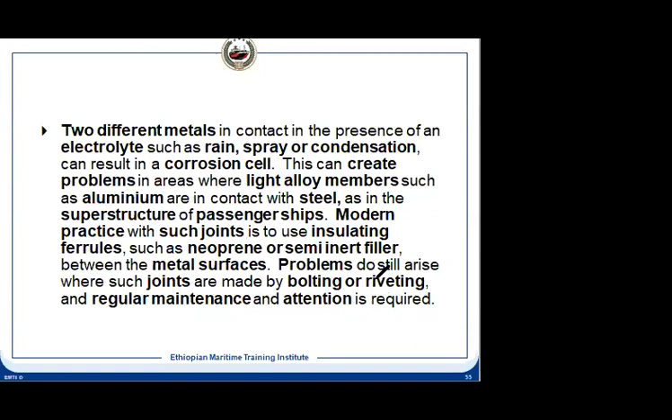The last slide in this chapter is that stainless steel is used in passive mode. Passive mode means the reduction potential is high and it is less active, so that it is immune to electrochemical corrosion.

And sacrificial anode security has to be checked. What is security? We have seen the sacrificial anode welded on the surface of the hull. So suppose, for an example, this is the anode, and this side is uprooted - it was welded here, but now this side is welded and this side is not welded. Then what will happen? We have calculated how much current, how many electrons, will flow through this. Now less electron will flow because this is uprooted from the hull, so protection will reduce. That is the reason this security should be checked, that it is welded, so that electrically it is connected. This can happen in the tanks also.

Now tell me, for the hull we have seen it is attached to the hull. In the tank, where is it attached to? Where do you think it should be attached to in the tank? So you have a tank, for an example, this is the tank, and we have a DB tank or the side tanks, and then we have the internals, for example these are the longitudinals. So where do you think it should be fitted?

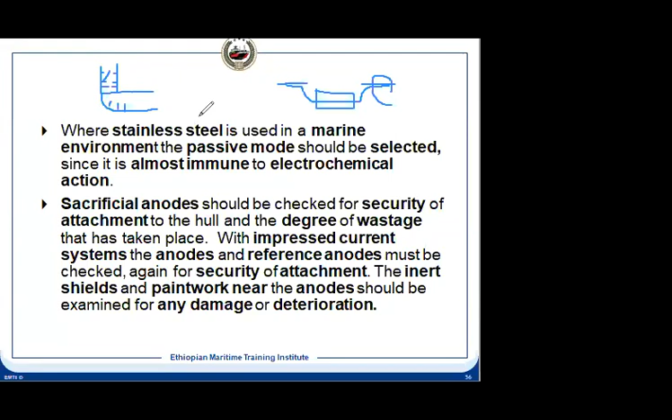And paint work has to be like an inert shield. Also for ICCP, we need to check if there is any blister. This used to happen when ICCP was new to our industry - at that time they did not realize this could happen. What we have seen is that hydroxyl and alkaline areas can get blisters, and the paint can get damaged, and that area can get corrosion. After that, they came up with special paint requirements. So that painted area has to be checked for any damage or deterioration, because otherwise corrosion will start in that area.

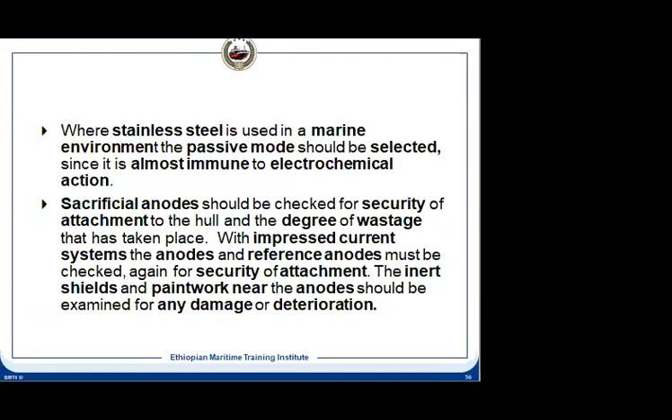Now there are questions on certain things. Like one question you had was about brazing in the last chapter, and brazing and soldering.

Now another thing - this is ICCP. Last class you asked me about ICCP in more detail. But was it covered in this chapter? I mean function 2, that is the electrical - it is part of it actually, but it's irrespective of that. Let me explain to you. So here we have the reference anode electrode, and this is the anode.

Now this is the control system. This reference electrode is measuring the potential of the hull, and this is connected to here, and then this is connected to here. Now this should be insulated, meaning it should not be connected to the hull here. So there will be an insulation barrier between the sensor and this, so that the hull potential can be checked.

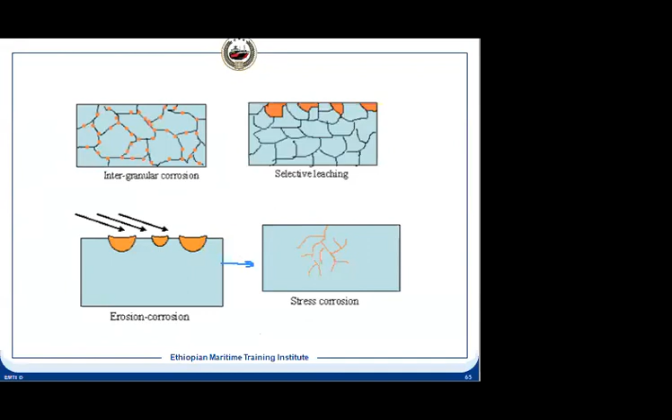So in this case, what will happen? This is the hull we want to protect. So the direction of the current should be from the anode to the cathode. That's why this arrow we've seen - the current is flowing from the anode, which is our ICCP anode, and giving the current in the direction from anode to the hull, so the hull will be protected.

And through this current is flowing through the electrolyte - this is the electrolyte, because this is submerged in our seawater. So the current flow direction should be like this. And why do you need insulation here?

There should not be any electrical connection between this anode to the hull, or reference anode to the hull. Otherwise, what will happen? It will short circuit. The current will not flow through the electrolyte. So that's why this has to be insulated always.

And the current direction is this. And if you see, this area has to have that special paint from here to here. The area will depend on your maker - they will tell how much area should have the epoxy paint, so that there is no alkaline damage to your paint. If paint is damaged, your hull corrosion will start.

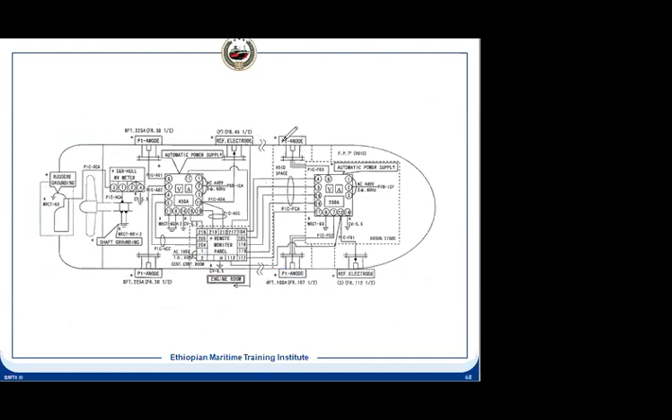Now certain things - how this area's construction, arrangement, you need to know, and how many you can have here in this diagram, but it can vary from ship to ship. In this diagram, if you see, this is an anode, this is anode, this is the reference cell, and we can put another reference cell here. There is a cofferdam here - so inside that you have the anode reference, and on the aft side you have this.

We have this anode, another anode, and the reference cell here, covering the complete ship. Through the anode, the current will flow outward to the hull, so the hull is protected. This is the sensor, a simple control system. There is a sensor sensing the potential, which is compared and given to the controller. The controller compares it with the set value, and according to that, the impressed current through the anode goes to the hull. So the forward part is through this, and through this. This reference anode measures the forward part, and this measures the aft part. This is the way it is done.

This anode also has a capacity. If you see here, it is written 225 amps, meaning that is the capacity. It has been calculated how much will be the maximum amps to be applied. It is kept higher than that so the anode should not get damaged, because it is impressed current supply, external current from the ship that we are applying. So the anode life should be longer, that's why a noble material is used for the anode. This is the basic arrangement and the principle.

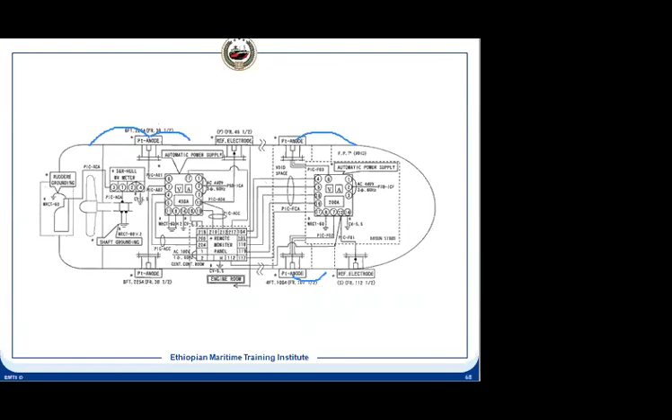It's all ICCP, same principle it maintains, because this concept has come from the corrosion cell I had shown you. And then this is the arrangement for the anode.

This is the anode, this is the sealed compartment, and then this is the hull. There is a neoprene material, which is the insulating material, and then it is blocked here. Inside, if you see, this is the Teflon packing you have. And after that, you have the nut, so you can tighten this nut, and this is like a gland. And this is an insulating barrier.

After that, you have the gland, this is the gland, and this is SEMKit. This is the filling, the service engineer fills it here, and then the electrical connection from here - suppose this is the anode, then the current will come through this, and it will give the current in the outward direction to the hull. So this is the arrangement of your ICCP anode.

And it should be in a cofferdam. And another thing is there, which is not in the syllabus, but is also important to you.

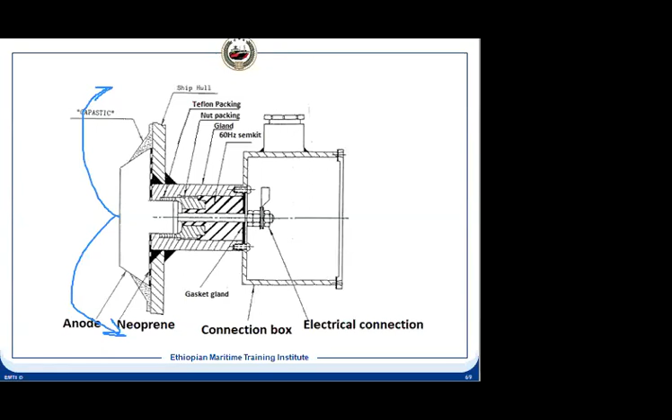I'll actually incorporate it once I review and we print it. The MGPS - MGPS also you need to know. So what is the MGPS? MGPS is Marine Growth Prevention System.

This is used for the seawater piping system. Why do we use it? So that when we are taking seawater from the sea, there can be marine growth which can enter, and then multiply.

Yeah, Melissa, tell me. Melissa.

Yes, Chief. I have one question on this ICCP before you go to this marine growth topic. On this ICCP system, when we go to the freshwater area, we switch off the system - that means the electrolyte is weak. So what will happen if we leave it like this? Is there any damage to the system, or what will be the consequence?

Thank you. So sometimes we switch it off because of the electrolyte. Actually, this design is made depending on the electrolyte. As I told you, this electrolyte changes - it is one of the factors for how much corrosion there will be, the rate of corrosion, and all the calculations will change. What we do, since seawater is more corrosive, we design as per the seawater. Once we design as per seawater, we run it in seawater. If we want to run it in freshwater, then the design criteria will change. It means in that case, what will happen?

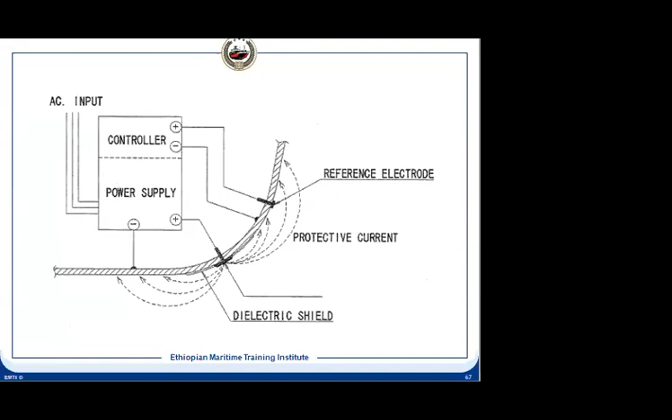Yes. Let us see the differences. Here, I had shown you this diagram from where we took the concept of ICCP. Current is flowing through the electrolyte in this direction, anode to cathode. What we have done is applied a current in the opposite, reverse direction towards the anode, and the anode will become the cathode and it will be protected.

Now, this is not sacrificial anode. What is the concept of sacrificial anode? In sacrificial anode, the concept is like this: this is the anode which is giving—zinc ion is coming out and leaving the electron behind in the metal, and that electron is flowing to the cathode.

That's why if you see the sacrificial anode, it is welded here, electrically connected here—that is not through the electrolyte. This is our hull, connected, welded here and here. What is happening? Zn++ is coming out, and because of that, 2 electrons are leaving in this metal. That goes in this direction to the metal we want to protect. So this is 2 electrons—from here, because it has to neutralize, it goes to the hull, and that gives you a cathodic reaction.

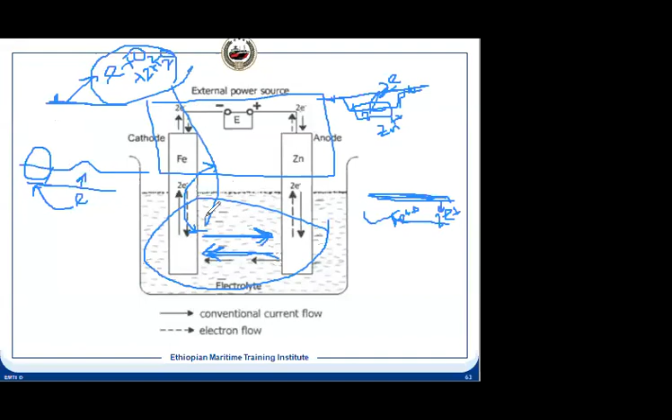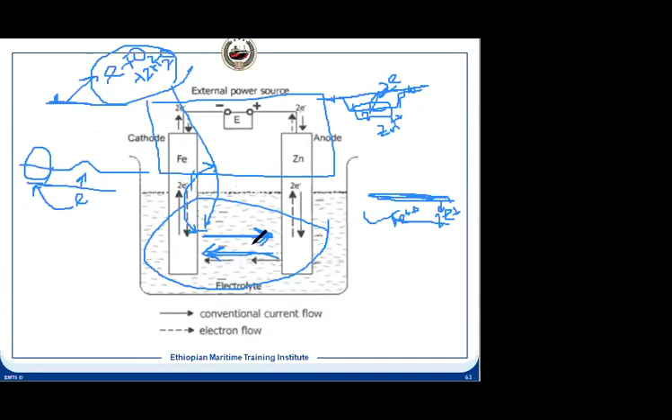So there will be some place where the cathodic reaction will take place, and it will get corroded. It can be uniform also. In that case, at all places electron will come out and metal also will come out, and the electron will react with water and become hydroxyl, and finally it will become ferrous oxide. That is the rust.

Is it clear, Sophonis? Yes, thank you. So I think Ateika wanted to say something. Yes, sir. Can you hear me, sir?

Tell me. So sir, when we are injecting current to the hull, what are we really doing? I mean, are we covering the hull metal from the seawater by electric field, or are we making the steel, the metal, non-reactive?

No. In the underwater portion, we have an anode, we have a cathode. In this case, this is the cathode, and this is the anode. And we have the electrolyte. Underwater portion, we have the steel hull. We have the electrolyte, the seawater, and we have one anode, the impressed ICCP anode.

Now what happens in the electrolyte if you have two metals, one cathode, one anode? This electric current is flowing in a particular direction in the electrolyte, from the anode to the cathode. It means the cathode is protected, we know. Current is flowing from anode to cathode.

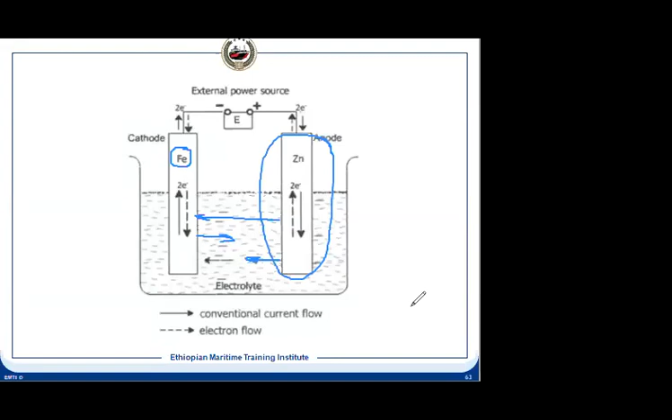That's what we are doing in ICCP. In ICCP we have an anode, the hull is Fe. Now, if you see what is the material for the ICCP anode, if you check the electrochemical series or galvanic series, that has actually more reduction potential than iron. So iron should get corroded.

But what we are doing is considering the direction of flow of current. Though it is platinum, we have applied impressed current which will come out from the platinum and then go to the iron, through the electrolyte.

So the direction of current we have changed. Though this is not zinc, we are using platinum, or some other also we use, but platinum, modern vessel, we use platinum. So actually in this condition, if you don't do impressed current, if you don't apply, what will happen? Current will flow in this direction and Fe will get corroded.

What we have done, we have applied the impressed current, and that current direction, we have changed it to this direction. So that the Fe, that is the hull, has become cathode. And this is the anode because the current direction is now from this to this. But if you don't use the impressed current, what will happen? Current will flow from here to here because the platinum is less active, a noble metal compared to the Fe.

So that's what we are doing. We are not making the steel or something, only the direction of current we are reversing. In normal condition, direction of current will be in this direction because this is more active than this. But what we have done, we have applied an impressed current. The direction of current we have made this way through the electrolyte. So what had happened? This has become anode, we call it auxiliary anode. And this is cathode, which is protected. Is it clear, Teka?

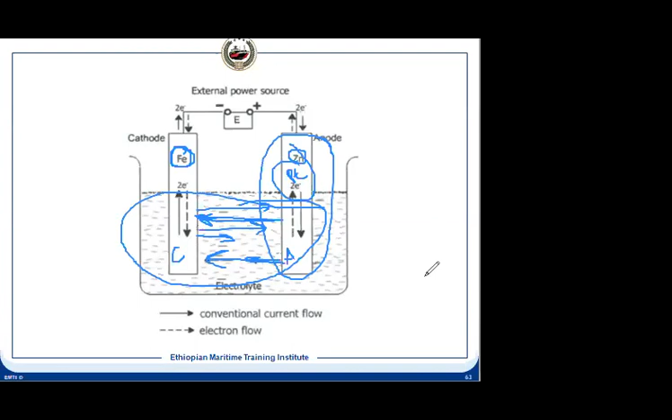So Teka, tell me, the rust or the corrosion means iron, in my understanding it's iron oxide. So from the iron, the electron flows to the water, so it will react with the oxygen. But if we can supply electron to the seawater, the electron will not take from the iron, but the electron will react with the oxygen. So the oxygen will not make reaction with the iron. But now in the previous diagram, as you show, the current is just flowing to the metal, to the hull again. So that's why, that's what makes me a little bit confused.

Let us see this again. This is zinc, okay? This is anode because it is more active. This is cathode. Electron flow and the current flow, let us check. This dotted line is the electron flow, and this line is the current flow. Zinc ion is coming out, electron is leaving in the metal, electron is moving this direction and coming to the cathode. Okay, but current will flow in opposite direction to the electron. Current is flowing this way. This is the external circuit.

And this current will come here and then it will move to this direction because the circuit has to be completed. This is the current flow, what I have just drawn. So what is the current flow in the electrolyte? From anode to cathode. What is the current flow in external circuit? From cathode to anode. What is the electron flow? Electron flow is opposite direction. So anode to cathode, we have seen the metal ion is coming out, electron is leaving, and it is coming here. And that electron is actually coming out here, which is making a cathodic reaction. And then this full reaction we have seen, that is the oxide is formed.

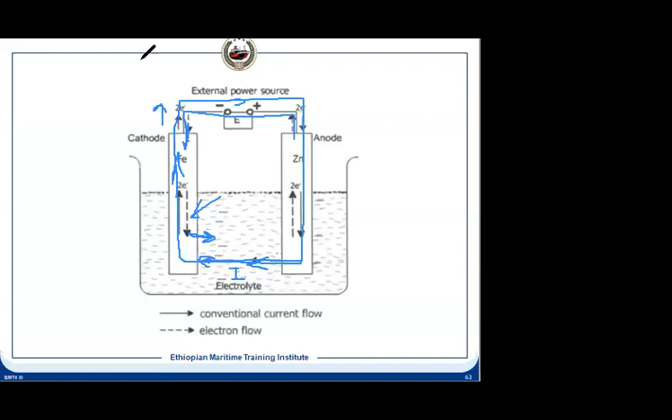Any other question? Otherwise, I think Sophonius raised hand. What was your question, Sophonius?

So when we use this platinum, nothing will happen to the platinum due to this current flow? Yes, that is the reason we use the noble metal. We don't want it to be worn out. It is a very noble metal we use. It has got a life, but it will be long life. That is the reason it is a very strong material we use, which is a noble metal. Otherwise, if you use a lower grade, it will get wasted because so high current is passing through that, and it will get wasted. You'll have to change it.

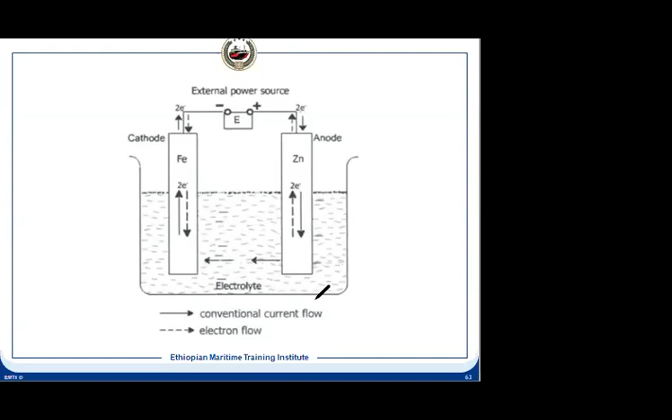Now the marine growth prevention system. So what is the marine growth prevention system? It protects our seawater piping system, and it protects our seawater pumps, any equipment with seawater flowing through it, that also is protected. What is marine growth? These are the aquatic life which enters with the seawater, and then it can multiply and stick onto the surface of the pipe. The heat exchanger filter can get choked because it will grow. Many of you might have seen the shell. Sometimes if your MGPS is not working properly, you will see that the filter is choked completely with the shell. So we don't want that. The primary purpose of it is to prevent the marine growth.

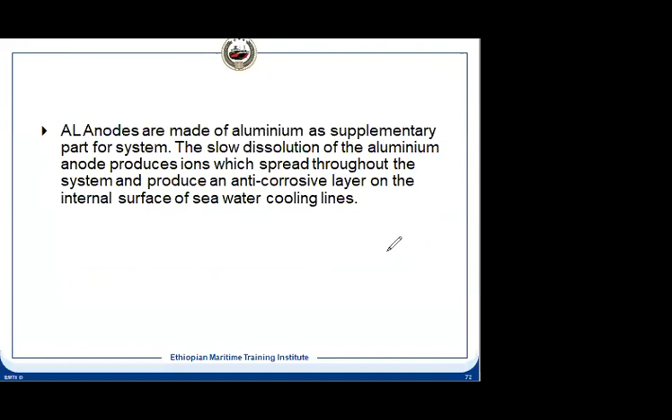Okay, so let's continue. This copper, we have seen what is the reaction, then aluminum, we have seen what is the reaction, and aluminum gives us a coating, an anti-corrosive layer on the surface of the seawater cooling system, including the pump surface also. Inner surface, it will protect you from corrosion.

So that is the MGPS system. And this MGPS, we apply IC, means the impressed current. Once we apply the impressed current, current is coming out from the anode. Once it is coming out from the anode, why we use the current, we can control how much ion will be coming out.

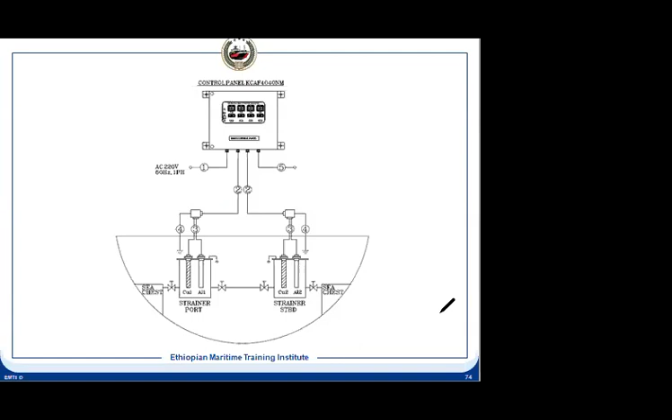Again, it is a problem. Hello, can you hear me now? Can you hear me? All of you having problem or some of you? Can you hear me now? Can you hear me? Hello? Is it clear now? Your sound is still broken. Is it clear or still have problem? No, Chief, your sound is broken. Okay, let me check. Chief, I can't.

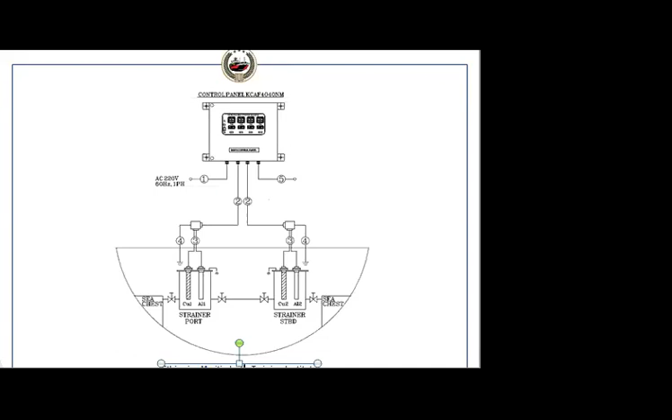So now tell me, is it clear? Is it clear now? Hello? Yeah, is it clear now? Yes, now it's clear, Chief. Now it's better, okay.

Let us restart. So this is the system we have. We use the impressed current here. For an example, this is the sea chest shown. You have the crossover, and then you have the anode on the port and starboard side, two anodes, aluminum and copper. And when you apply the current, what will happen?

How much current you apply will depend, because the anode is in the electrolyte, and the current is coming out from the anode. If more current is coming out, what does it mean? More metal is wasted, dissolved in the electrolyte. So we can control how much quantity of metal we want to dissolve in the seawater when it is flowing. So we know the capacity of our system, and accordingly it is made, meaning accordingly how much impressed current will be applied.

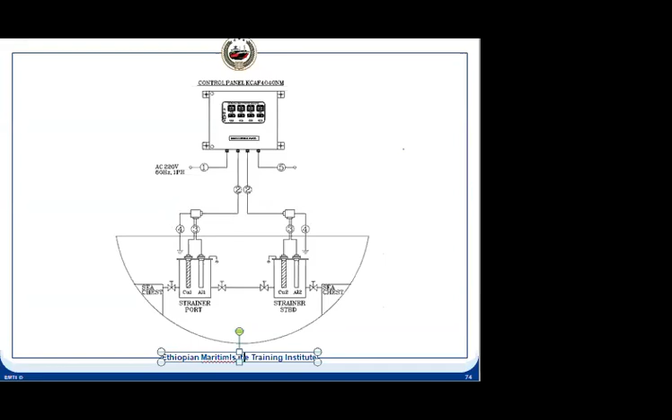The EOB asked one question, about the anti-fouling ion which is preventing marine growth. That copper ion which is coming out, that is preventing the marine growth. It means it does not allow marine growth. It will actually kill the marine growth, and also not allow it to stick on the surface. Whereas aluminum gives us anti-corrosion protection, a layer on the surface. So that copper ion is protecting from marine growth.

So if you see, this copper ion is carried, transported with the seawater, and that prevents marine growth. It means it does not allow marine growth, that aquatic life, to grow in the system. So they go out from the system and will not get accumulated in the system also because of this ion. Like for example, when you see freshwater treatment has already been done, we have the Ag ion which actually kills bacteria, the marine life.

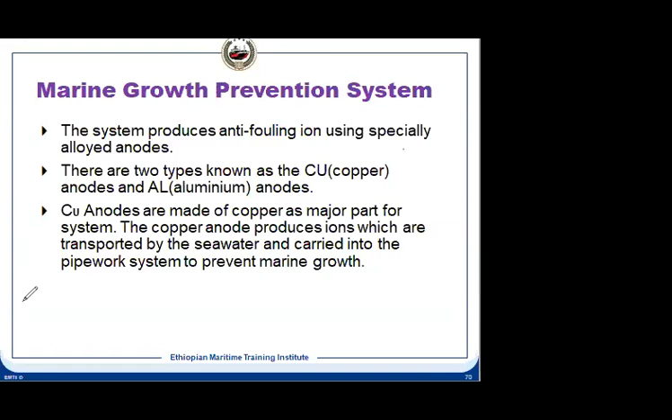So here also, the copper ion and silver ion both do the same thing, but silver is better than copper. Here we use copper because it is only for seawater. So this ion, what is it doing? It is killing the aquatic life, the marine life. Those can grow and damage our system, it can get choked.

So with this impressed current, we can adjust how much ion we want to dissolve. Accordingly, the impressed current is adjusted. It will vary from system to system. On your ships, you must see the manual for what current, the impressed current, is to be applied to the system. So if you increase the impressed current, what will happen? Your metal dissolve rate will be high, and your electrode will be wasted faster, so you'll have to change it.

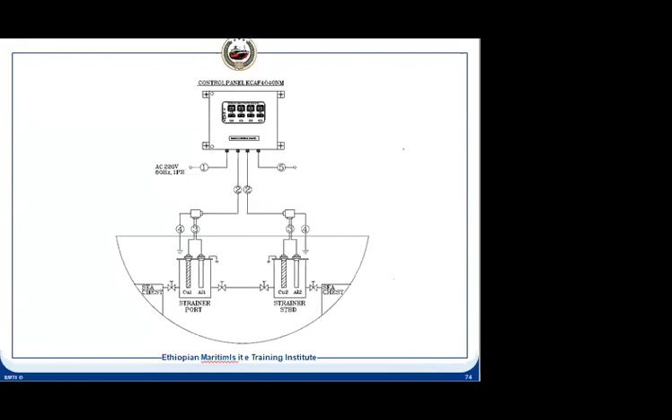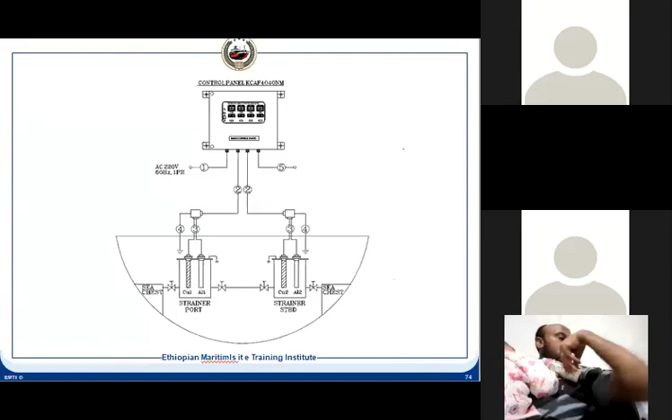So if there's no question, then let us start the next chapter.

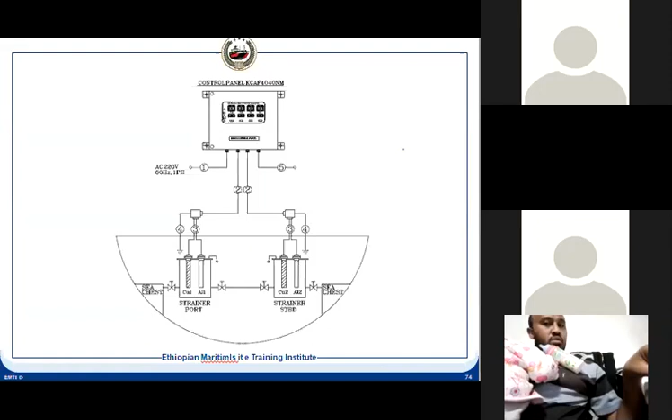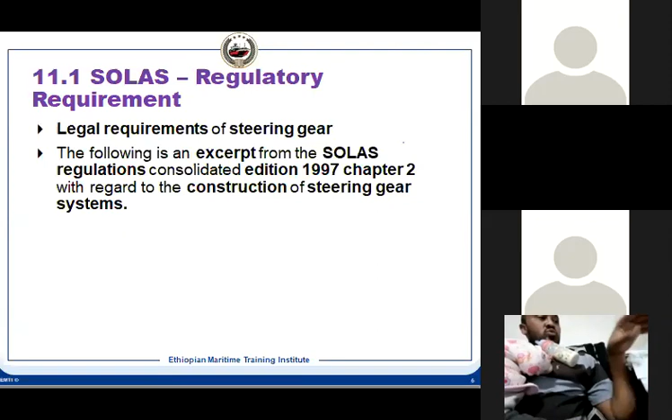So the steering gear. This is one of the critical equipment on board the ship. In steering gear, there are some regulations, and it comes under SOLAS regulation. In SOLAS chapter 2, it is there. In steering gear regulation 29, every ship must have a main steering gear and one auxiliary steering gear as per the regulation 29. And it has to be satisfied with the administration.

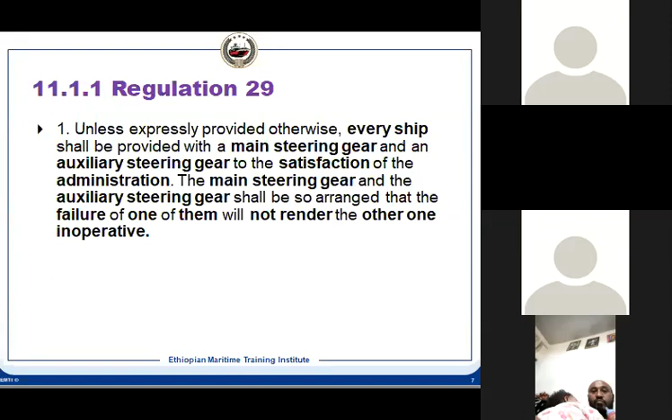What do you mean by the administration? Who is the administration? Tell me, we'll answer to that. Is it clear, my question? My question is, it is written that satisfaction of the administration. Who is the administration? It means steering gear is installed on ship. So who do you think is the administration? Anybody wants to answer? Can you hear my question?

Yes, we can hear you. Is it a class society? Tell me. I think the classification society will be the authority. Okay, any other answer?

So let me answer you. This administration is not the classification society. It is the flag state. So flag state is the administration. Classification society is RO. Classification society has got a very big role in the shipping industry because the ship is built under classification society rule. But the administration - when classification society does the statutory survey, they are the recognized organization by the administration. So the administration is the flag state, because flag state is the member state of your IMO. Classification society is also linked with IMO, but the administration is the flag state.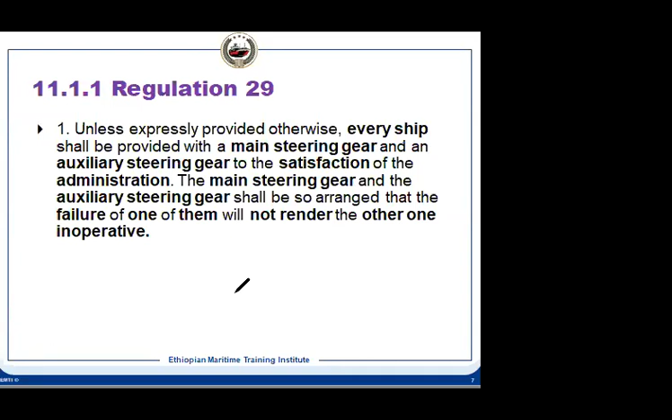So main steering gear and auxiliary steering gear should be arranged in such a way that if one fails, it should not affect the other's operation. It means if main fails, the auxiliary should not be affected - auxiliary should be in operation. If auxiliary fails, main should not be affected - main should be in operation.

Then the steering components - that is the rudder stock - and all the steering components, for example hydraulic ram, piping system, rudder stock, tiller arm, foundation, bearings - all has to be in sound condition. It should be in very good condition, it should not fail, because it is a critical item. Because without the rudder, the ship cannot maneuver, the ship cannot change direction - it will move only in one direction. And special consideration needs to be taken for components which are not duplicated.

For an example, the rudder stock - is it duplicated? No, it is one. You can have twin screw, twin rudder, but there is no duplicate - both are being used actually. So wherever there is no duplicate, special consideration has to be taken. Suppose the carrier bearing is not duplicated, then what will happen? You'll have to use such a bearing - smaller vessels use ball bearing or roller bearing, where friction is less. And sleeve bearing can be used on larger vessels, where permanent lubrication should be there.

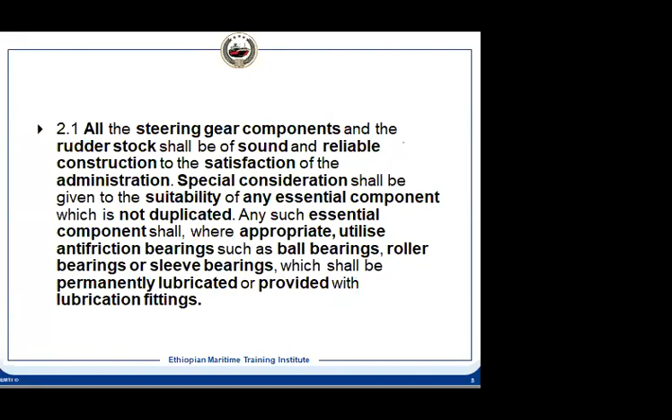Like on large ships, the carrier bearing has permanent lubrication. It can be oil lubricated or grease lubricated. So these are all the SOLAS requirements.

Then what will be the design pressure if we are using a hydraulic system? In that case, the design pressure should be 1.25 times the maximum working pressure. That is the requirement, so that it can withstand much higher pressure than the maximum working pressure.

And also there is regulation 3.2 - this was 2.2. In that regulation, there is some performance to be satisfied for your steering gear, like how much the steering gear will move port and starboard, how many degrees it will move, and how much time it takes to move from one particular degree to another on the other side. All this comes under regulation 3.2, and it has to comply with it. Based on that, the system pressure will decide how much pressure is needed so that it can move, because you need torque to move it.

Another thing is fatigue - because the pressure is always changing and varying, there will be fatigue load, and that fatigue criteria should be considered for the design. It should not fail, as we know that fatigue strength is lower than tensile or compressive strength. So it has to withstand that also, and there will be pulsating pressure forces, dynamic loads. So all this combination will be there, because the rudder will have dynamic load.